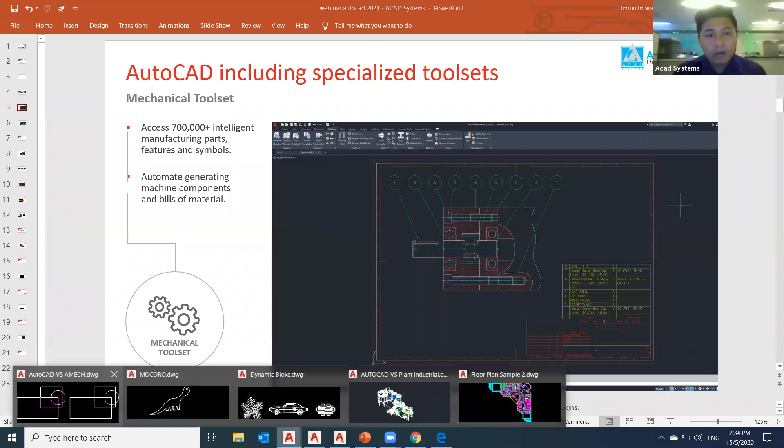For the first topic, which is mechanical toolset, I will share my screen regarding my software. So this will be my normal AutoCAD, my basic AutoCAD. When you use normal AutoCAD, if you plan to create this left area to your right area drawing, you need to do something like this.

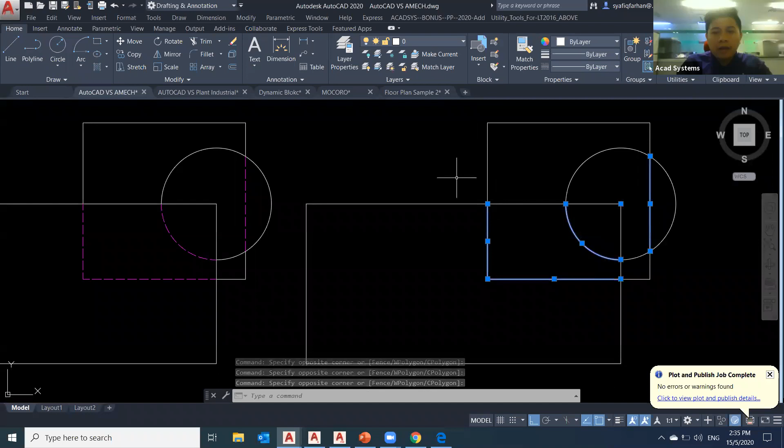You need to trim 1, 2, 3, and 4, and then redraw a line, and also arc - start, center, end, start, center, end. I just simply trim again, and then choose the line that you want to use and specify the layer. Am I right? So that will be the method that you need to do.

But if you're using AutoCAD Mechanical, for example, the most proper way to do this thing - I will show you.

For that specific topic, we call it a hide situation - so circle and also rectangle, another rectangle, using AutoCAD Mechanical. At top you can see AutoCAD Mechanical 2020. Apa yang you boleh buat, just simple step, klik dekat hide situation. So you just simply click on the hide situation button.

So hide situation means you want to put something into a level, right? The first step, I just need to click on which block that I want to include, 1, 2, 3, and press enter. So then all will appear here.

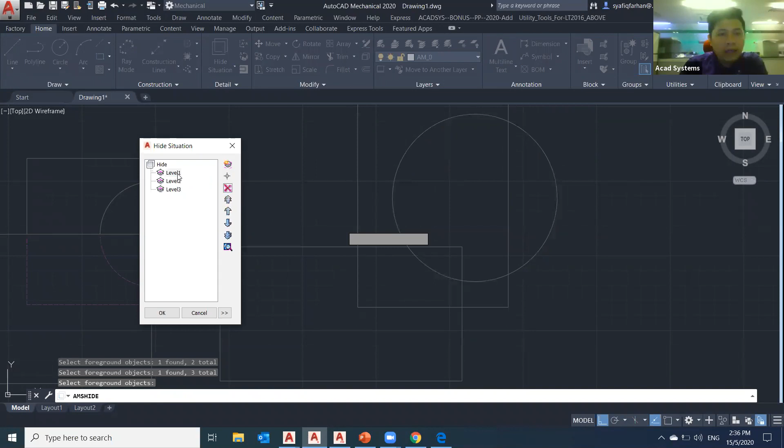So level 1, level 2, and for example I want to add another level, I just simply click on here, new level, level 3. Now I can delete this free object, add a new one. For the first level, level 1 should be this circle, enter. Level 2, select object, this first rectangle.

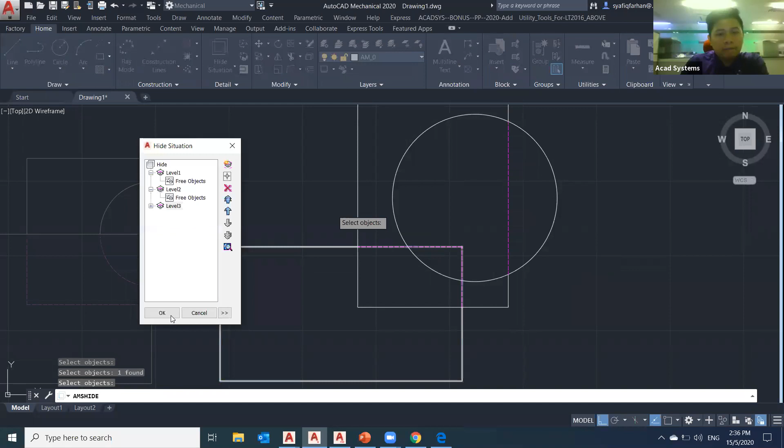Okay, and for level 3, I simply click on the third rectangle, enter. Now you see on my screen this object automatically updates into the first level, becoming circle 1 - meaning the circle becomes the top one, because it has no hidden line. The second rectangle becomes the second level, so it sits in the middle, below the circle.

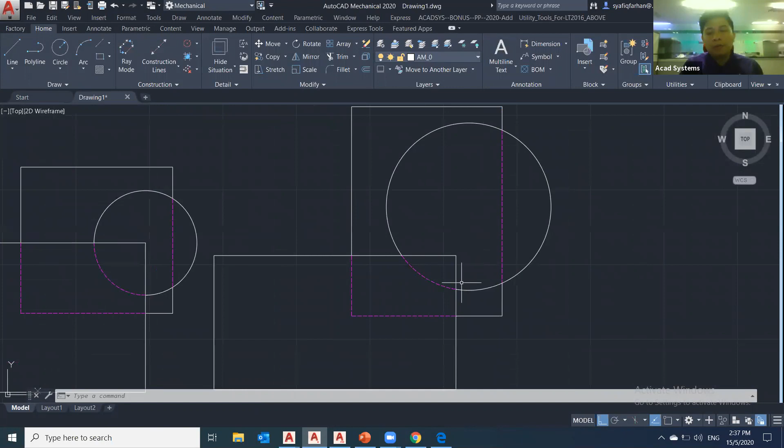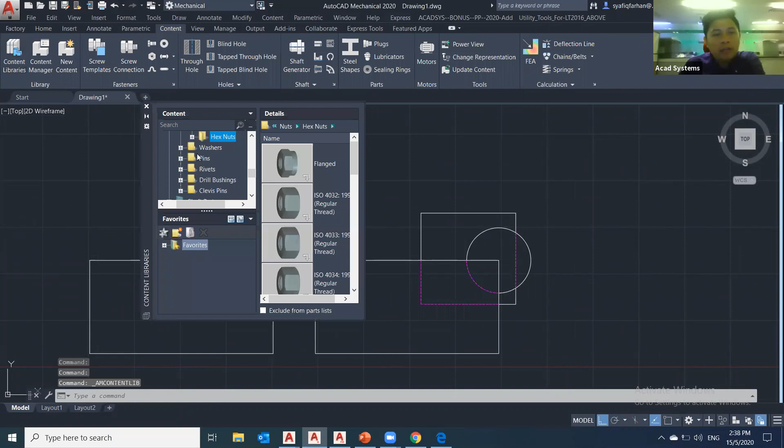So using AutoCAD 2021 or 2020, or you can simply use Mechanical. You can also click on this content, go to the content library, and choose whichever library you want to use - for example, screw, countersink. This will be the first example.

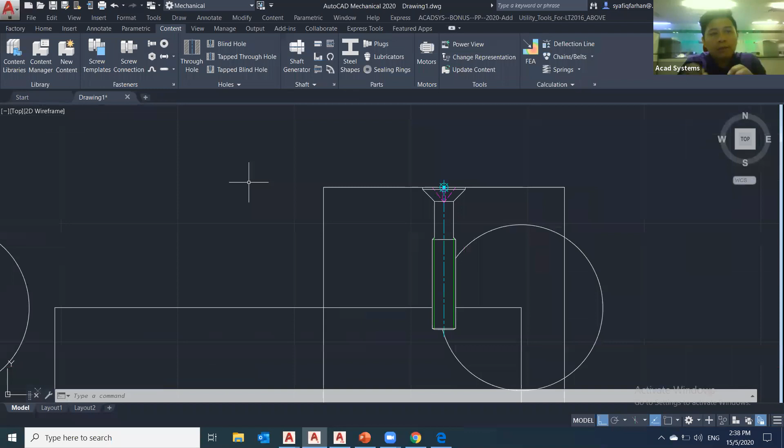Choose size M10 or something. See, it's already auto-trimmed everything. So AutoCAD Mechanical is super powerful because the library is already included in AutoCAD Mechanical. You don't need to download AutoCAD Mechanical separately. That's it, that's the first topic.

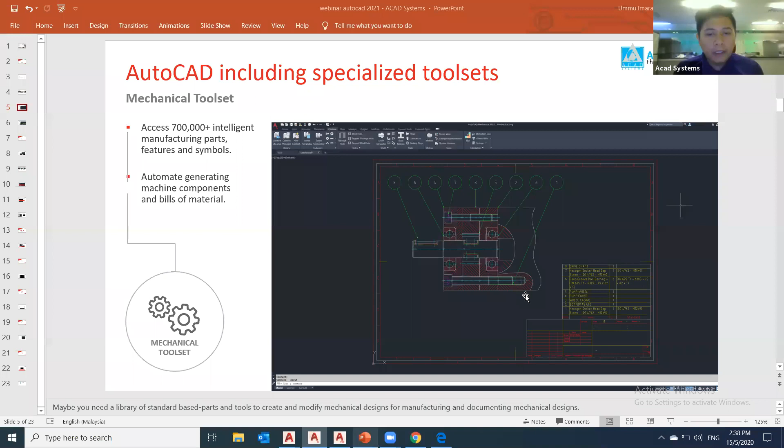For the second topic, this is about if I plan to go to Plant 3D to make a P&ID, meaning a 2D schematic drawing, or if I want to make a 3D piping design in Plant 3D. So is it proper to use normal AutoCAD? Normal AutoCAD is good, you can do 3D, no problem. But the problem is how fast you can do it.

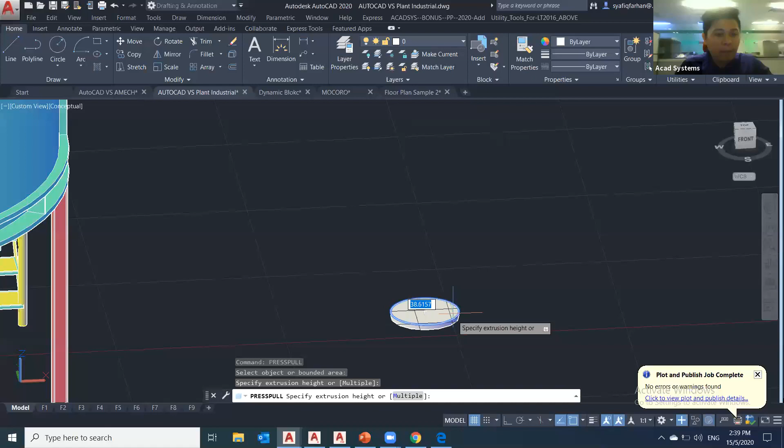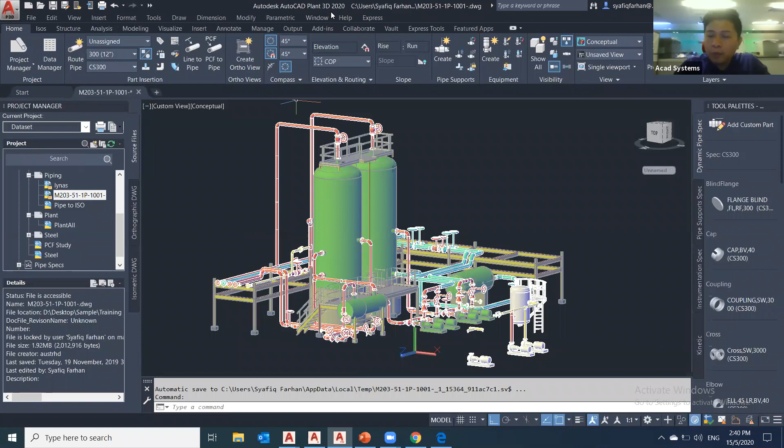But if you use Plant 3D - okay, now I go to AutoCAD Plant 3D. All of this you can download. You can just go to the Autodesk website. If you want to try first, you can go for the trial version, or if you feel AutoCAD is good for you, you can ask our team members to inform you what needs to be done next.

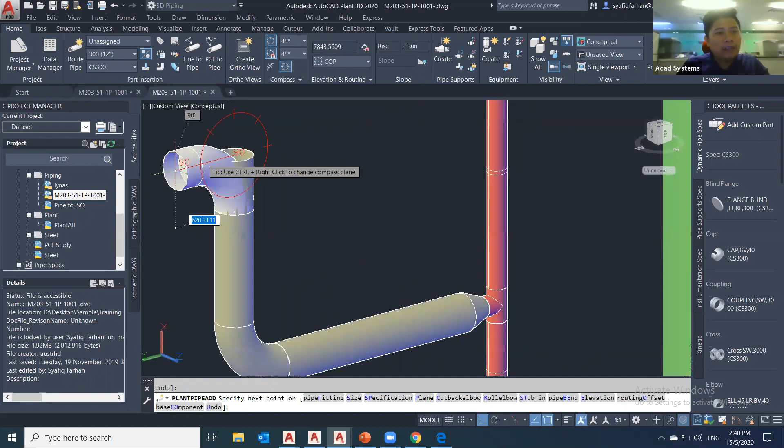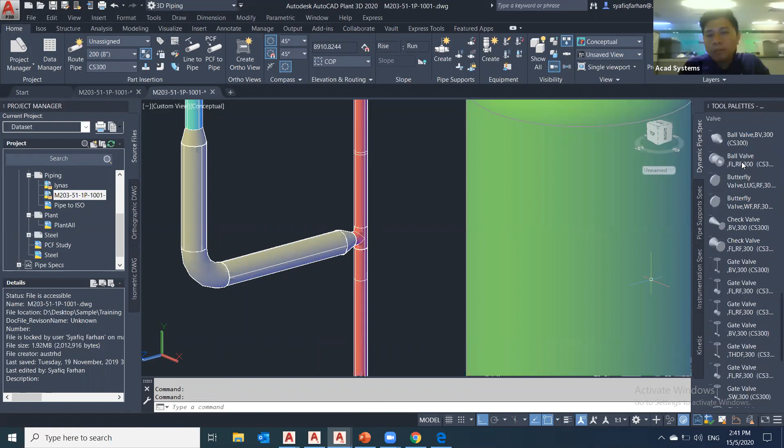Not simply using normal AutoCAD, because that will drag out your time there, making one single part at a time. If I want to put a valve or anything here, I can just choose - for example, I want to insert a ball valve. Now here it has automatically created the ball valve on our piping. So that's the first module, or the first chapter we want to cover, which is the specialized toolset.

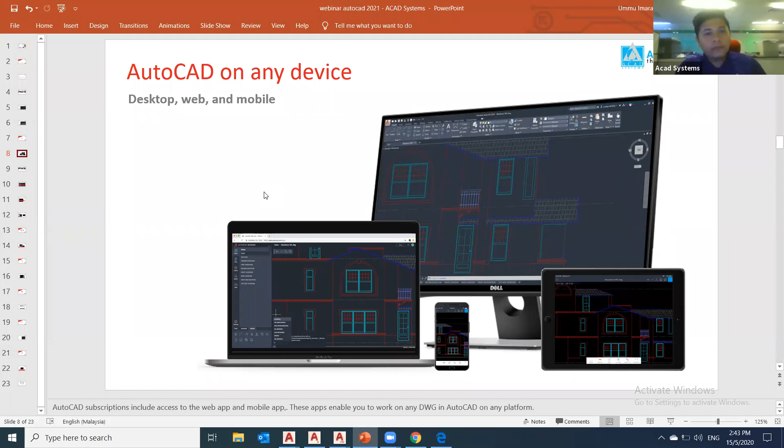So for the third and fourth points, which is block palettes and also dynamic block. I believe all of you are already familiar with block. What is block? Block means you want to use one item repeatedly.

For example, in this drawing, when I have this type of car, I want to use this car maybe two or three times, so I can copy this block.

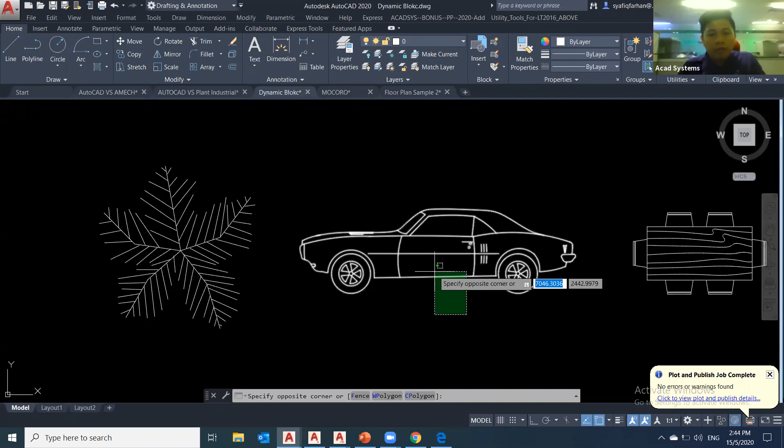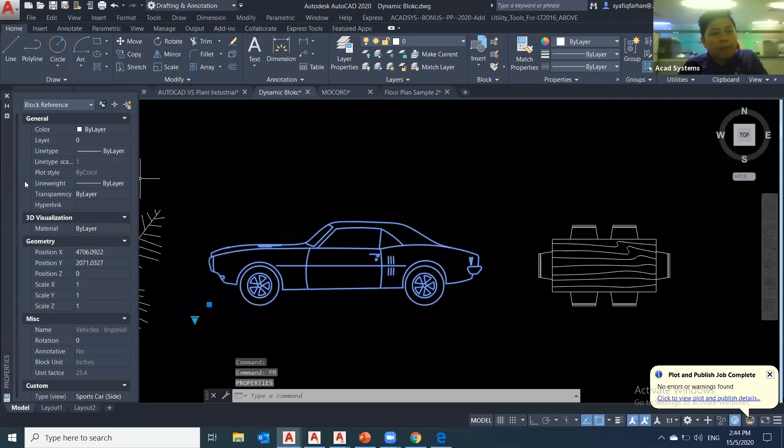If this object is not a block, you need to choose all these things one by one, for example this table. But if this object already becomes a block, you just need one single click, or check on the properties here, block reference. Later I will show how to create one block.

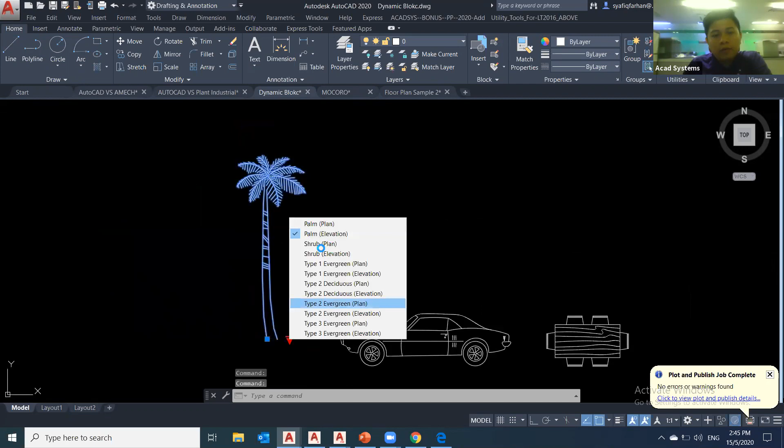What is block? For example, dynamic block. Dynamic block means, for example, these trees, I can change this tree into this object. So you can simply change it. For AutoCAD users, to have this type of block, these two types, this car I change first.

Front view, truck. So for AutoCAD users, you can use this command to call this block, this type of block: TOOLP, for tool palettes.

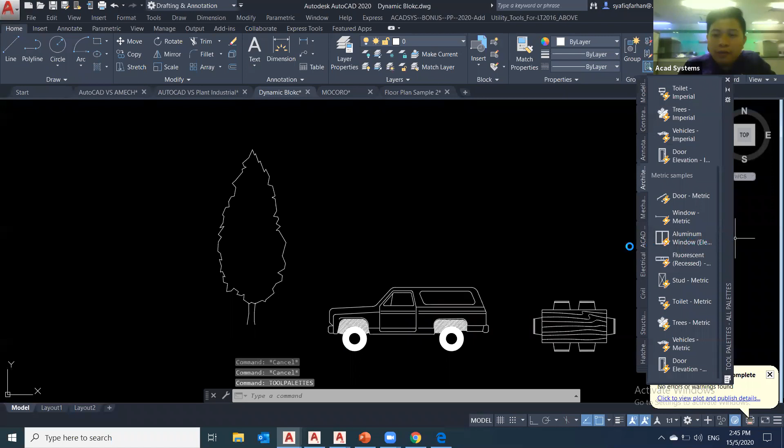Over here, they have a few libraries. You can choose what type of library you want to use. For example, I want to use architectural, and I want to put the toilet. This will be the toilet. Click, and they will have a flip button to flip, and also this one to change.

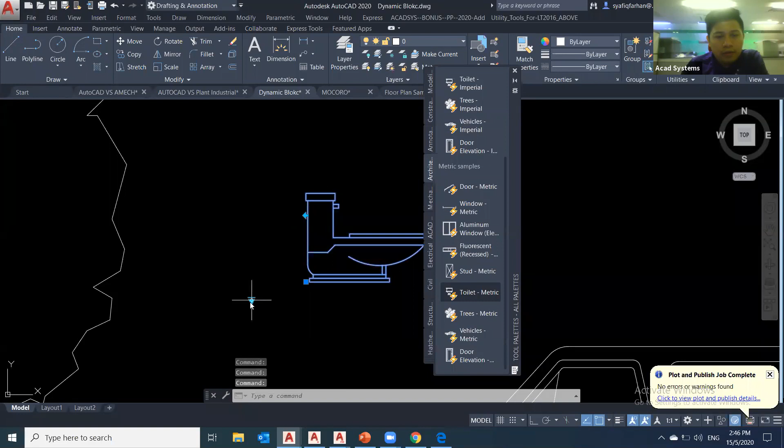So I repeat, the command will be tool palettes, TOOLP for tool palettes. All right, so clear about this.

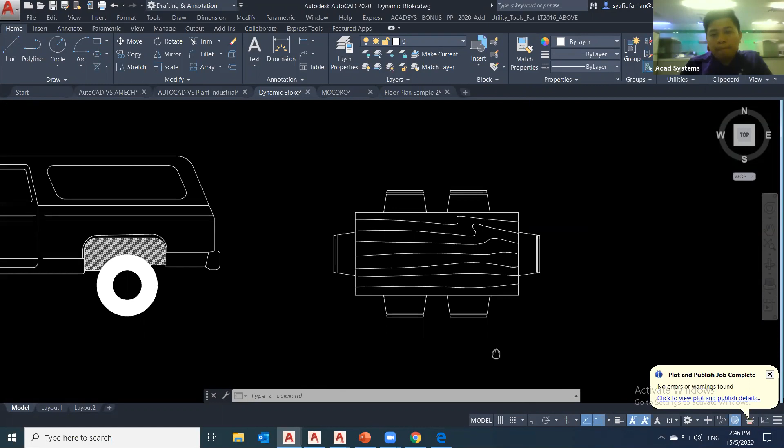So how to create a block? Very good, dynamic block, so this will be the sample. You need to draft one object first, so select everything. Normal method for creating block: B for block. B, enter for block.

First thing, you need to put the name of the block. For example, this one I want to put table. So I put the name as table here. And the second important thing here, you just simply click on the pick point. Pick point. And after that, you just tick on 'open in the block editor'. Only that step to create a block.

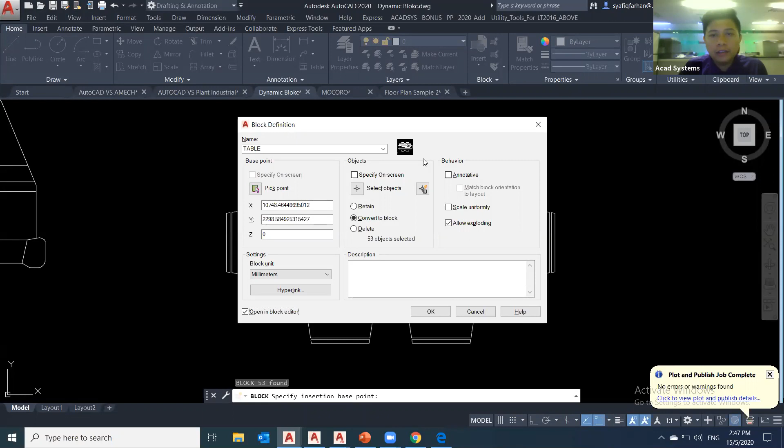But how to create a dynamic block? Same like that tree. For example, for this table, I want to change the table from 1 chair, 2 chairs, 3 until 6 chairs. How to do it? I just open it in a block editor.

By default, you will go to another area, which is this one, we call it the block editor area. So first step, at the side here, go to parameter tabs, visibility. Click, and click anywhere, it doesn't matter where you click.

Second step, go here, visibility state. This visibility state is the area where you need to set what name you want to put. For example, for this case, I want to put 1 chair, 2 chairs, 3 chairs until 6.

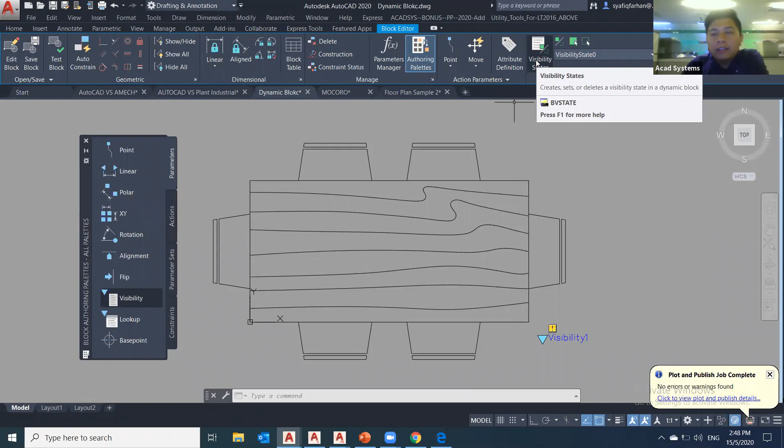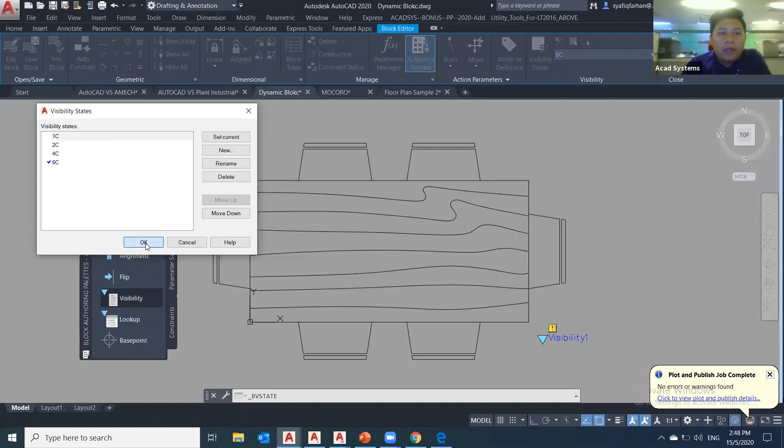So I click here, so I put a new one: 1C for example, 2C, 4C, and 6C. This visibility state 0, you can delete because we don't use it anymore. And hit OK. For 6C, it means you want to show all 6 chairs over here.

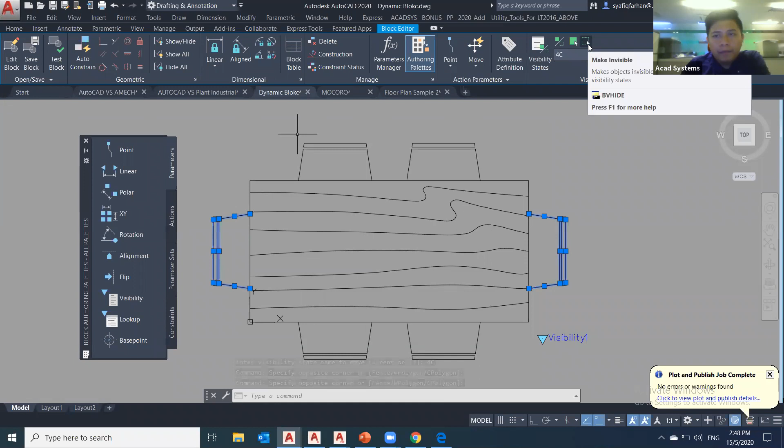But for the 4C, you need to hide something. Select this thing, click on make invisible, meaning you will hide this one. Make invisible. Okay, go to 2 chairs.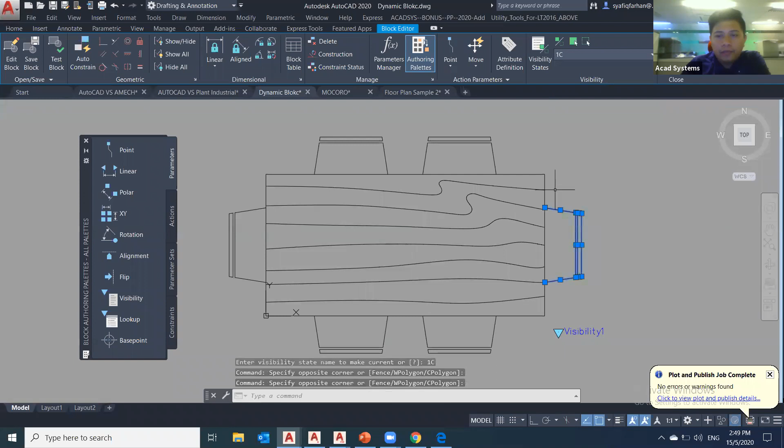So select, for example, I choose this one, these 2, and this 4, total 4, so make invisible, so it already disappears from the screen. And the last one, 1 chair. Just select first, and after that, also the same step, click on make invisible. So that will be the step to create a dynamic block.

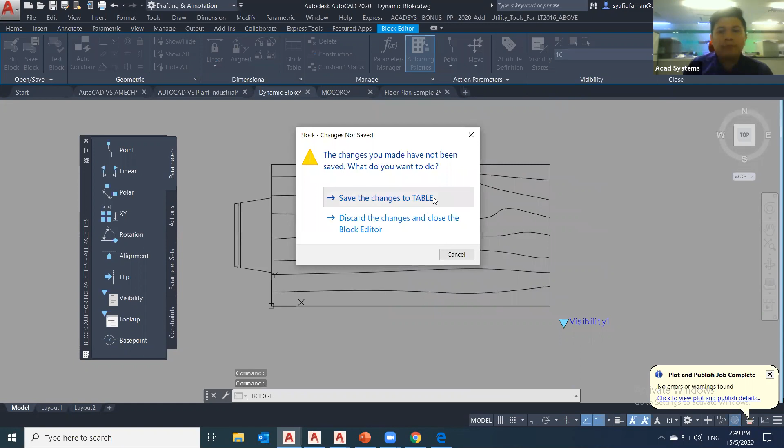Then you just simply go here, click on finish block editor. So press here, save. So now your block is already updated, so it becomes one. So how to change it? Just simply click the down arrow button: 1 chair, 2 chairs, 4 chairs, and also 6 chairs. So that will be the concept that AutoCAD uses to create this car, this toilet, and trees. We call it a dynamic block.

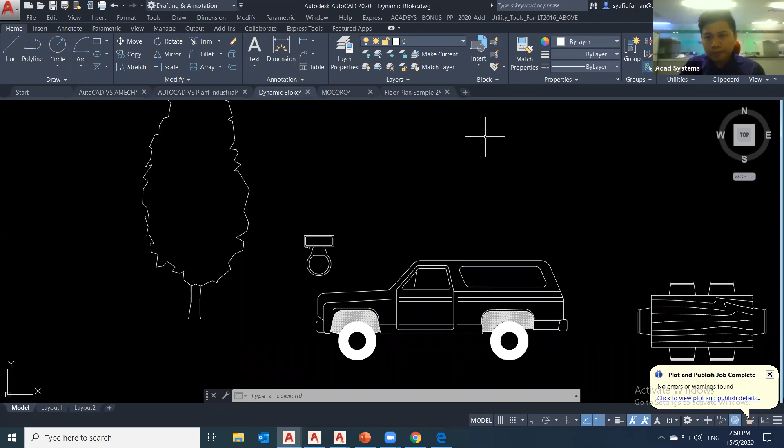Okay, so the next topic we need to cover is what we call MOCORO. This combines features - AutoCAD already combines move, copy, rotate into one command. So how do we use it?

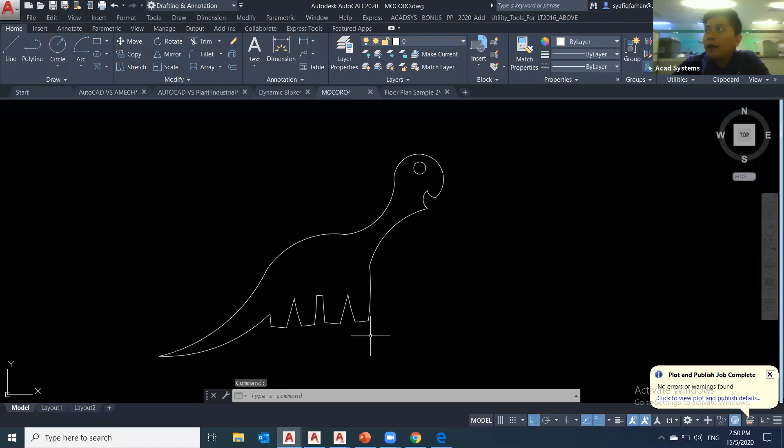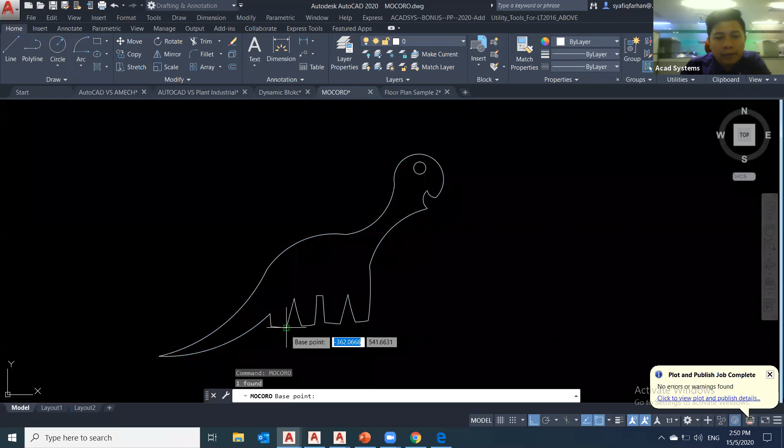Let me open one simple drafting here. To use MOCORO, you just select the object, click on MOC for MOCORO, enter. Base point is the most important one - for example, I want to choose this point as the base point. To move, I just click on move. To copy, I just press copy.

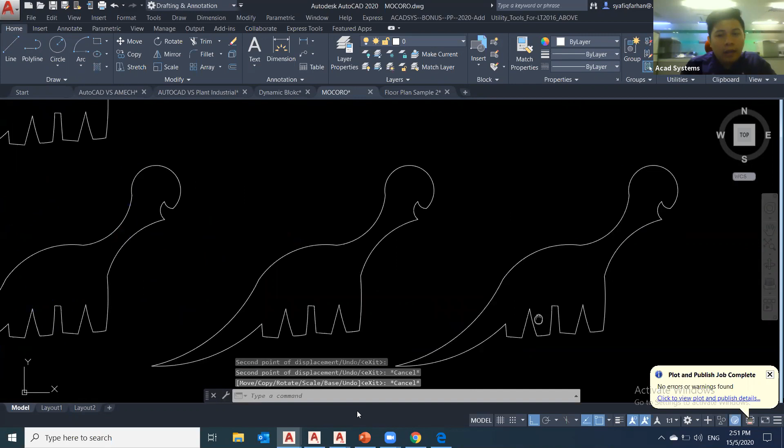Here, and also here. You can use MOCORO at this point too - you can rotate, scale, and undo. So those are the things you will use with this MOCORO command.

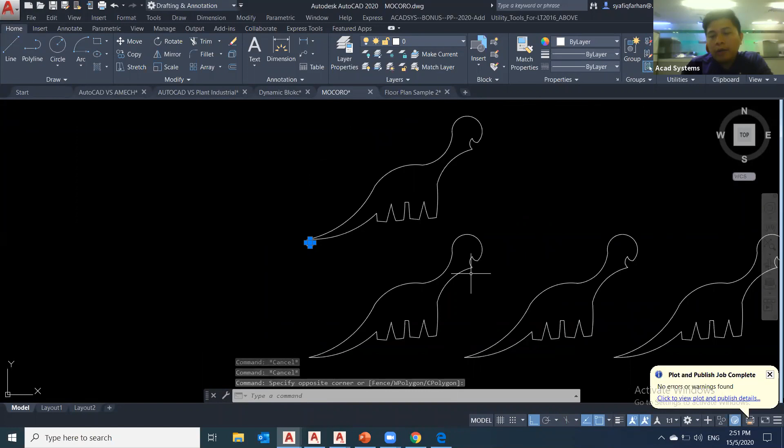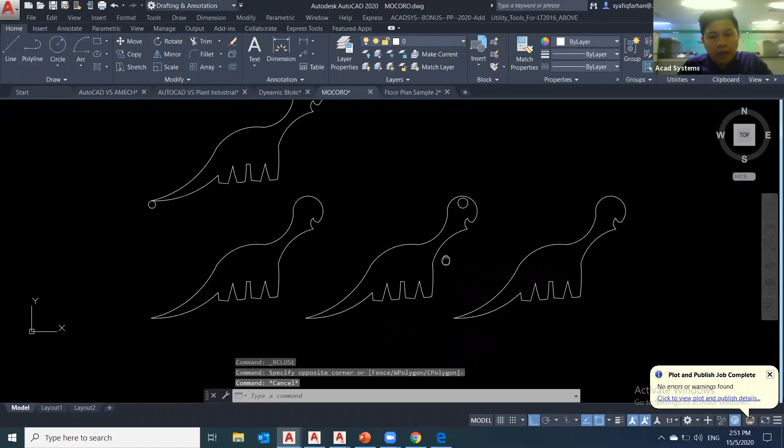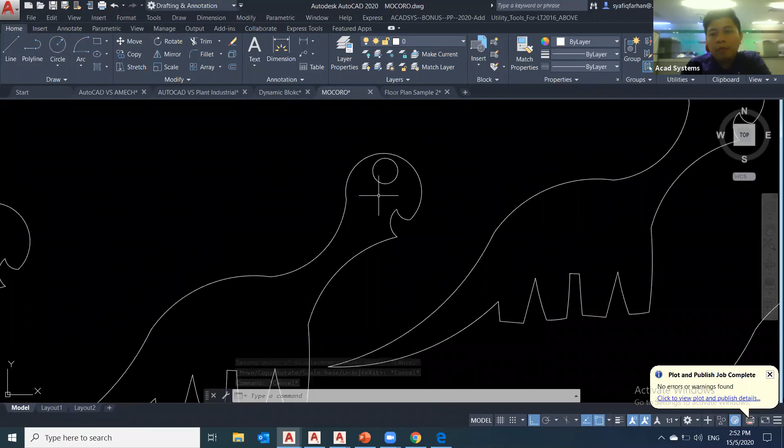Notice that this object, the eyes, are not following together. The reason is because this object is only a single line or polyline, not a block. For example, let me create this object as a block - B for block, draw, close block editor. So it becomes a block. Now when I try to use the command MOC, enter, base point here, I can move with the eyes, copy with the eyes together. That's the reason why the first one didn't move together. So you can try using this MOCORO - for example, if your company keeps repeating this process, you can use MOCORO.

All right, another part is about match properties. I believe all of you are already familiar with this. Match properties is used to copy one object's properties to another, using AutoCAD.

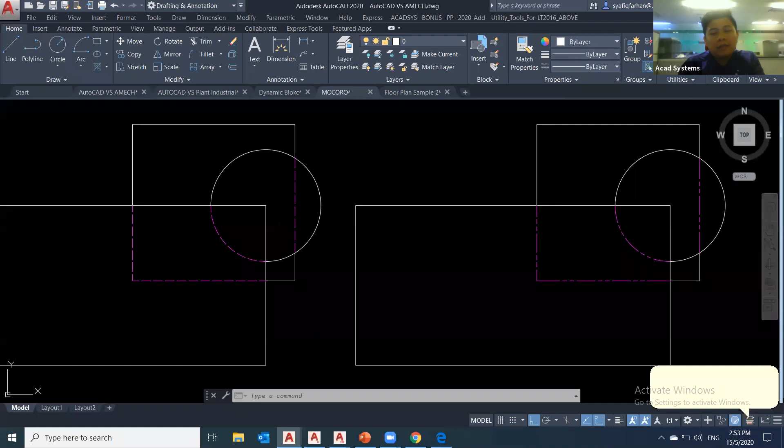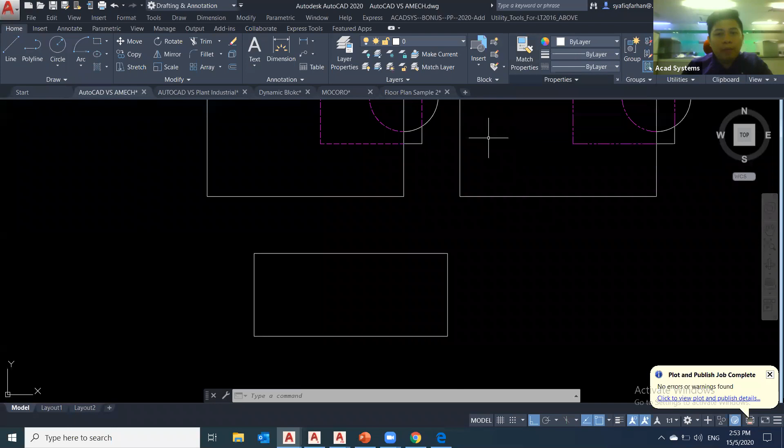So I have another rectangle. I want to copy this magenta dotted line style to this rectangle. What's the fastest way? Match properties - you can click on the match properties icon, or use the command MA for match properties, enter, click here and click on this rectangle.

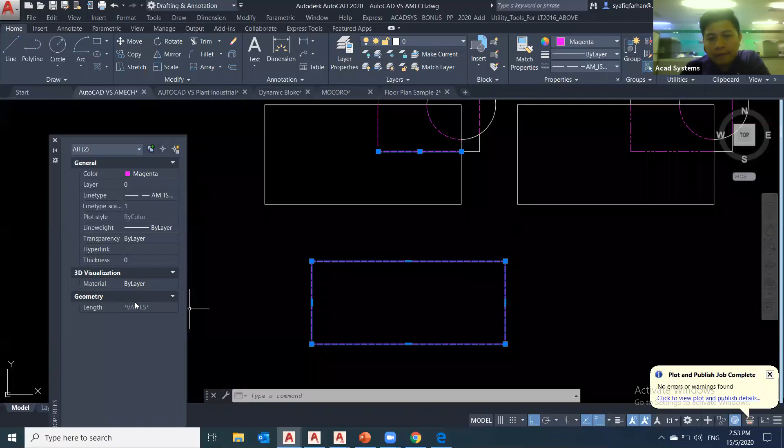AutoCAD software will help you check into the properties - the color will be the same, the line type will be the same, only the general properties are copied together, the length and so on is different - various. But when I try to click another one, all become various because combined - this becomes magenta plus white, then becomes combined. So match properties means it helps you copy these properties from a source to a destination.

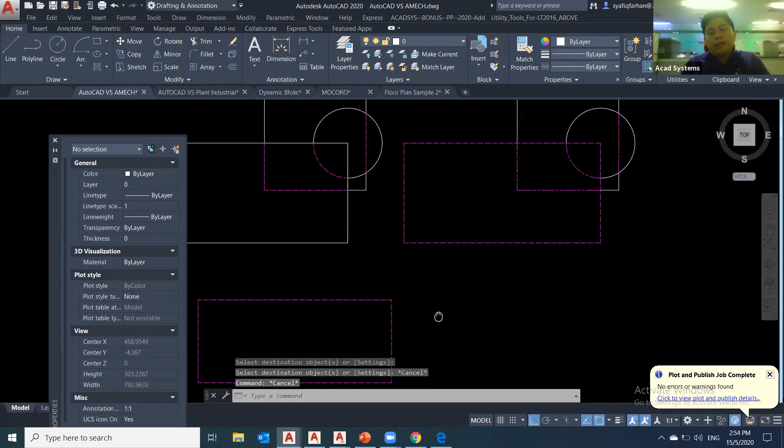Match properties. So here's an example - for the small gear, you want to copy the black color from the big gear to the small gear, so it becomes like this. Match properties.

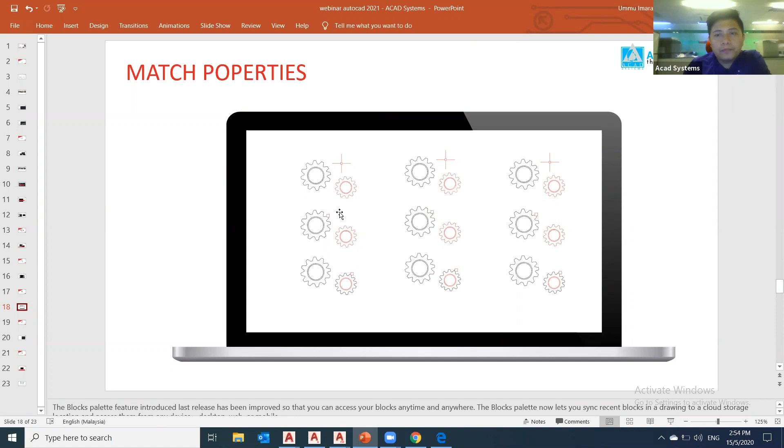Right, so for the next tips and tricks, the seventh one: if I have two drawings, a first revision and a second revision, and my boss or lecturer asks me what's the difference between drawing one and drawing two, what changes have I made? To do that, you need to have two revisions of the drawing.

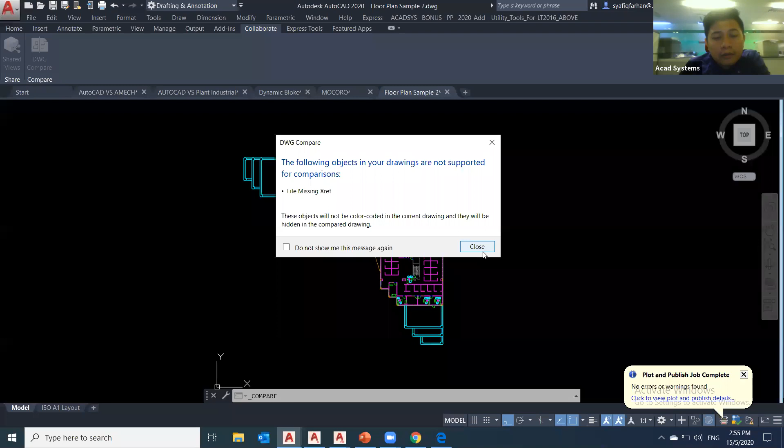So you simply go to this AutoCAD drawing, the first drawing, click on the Collaborate tab over here, click DWG Compare - you can compare revision 1 and revision 2. When I click, you'll see they have two colors.

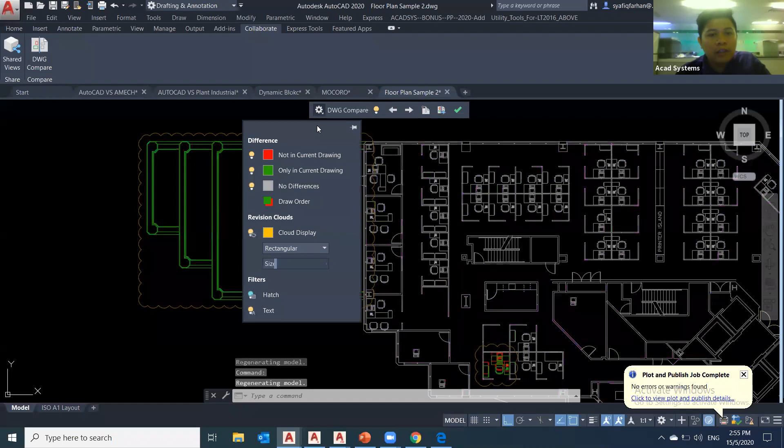The first colors are green and red. So here, DWG Compare - I can change the settings, and you can also change the colors here. For example, I want to change it to blue, so it becomes blue.

So for this comparison, you can see this will be from drawing 1. The green color means from drawing 2, the blue color means from drawing 1. Drawing 2 here has already been stretched, and drawing 2 here has already been moved.

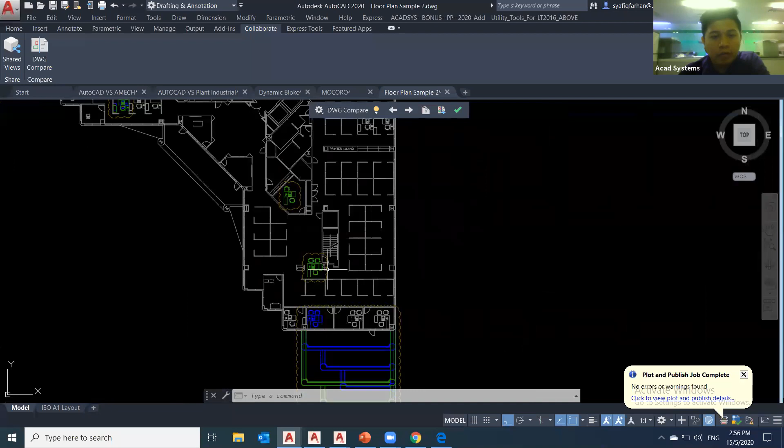For this area, there's no blue color, meaning this is new. This is also new. For this area, there's no green color, meaning previously in revision 1 the drawing had a table and chairs there, but in revision 2 they've already been changed or deleted. That's the concept of how to use drawing compare.

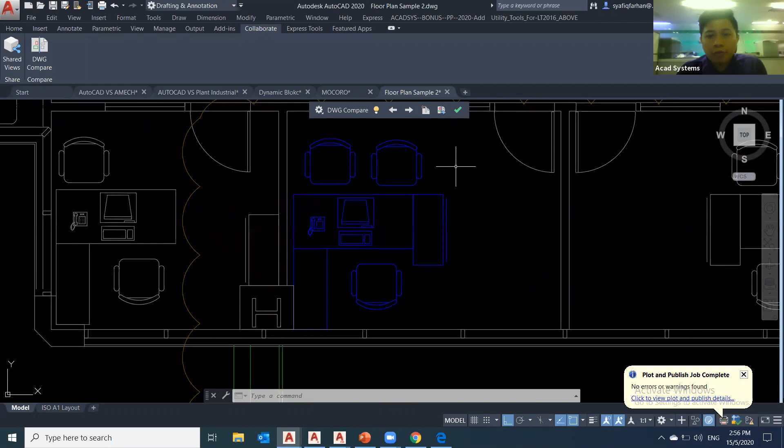So drawing compare is quite straightforward and simple. The method, I'll repeat: Collaborate, Drawing Compare, and try to compare at least two drawings.

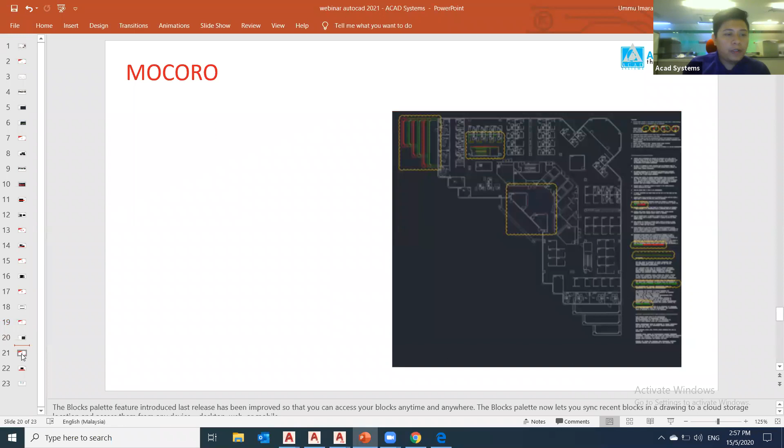Okay, and for the last point, PDF import. This is a very good feature for companies - normally a company will receive a drawing PDF from a supplier, for example. So I only need to open a new drawing.

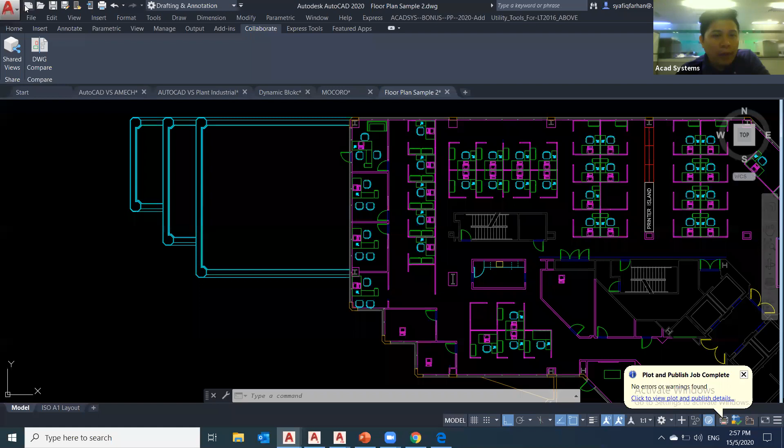Go to Insert - here you will see a button, PDF Import. For example, I have one sample PDF, the floor plan sample from before, the house drawing from before. So I simply do PDF import - I can go to my folder where I saved it, tap it and hit OK.

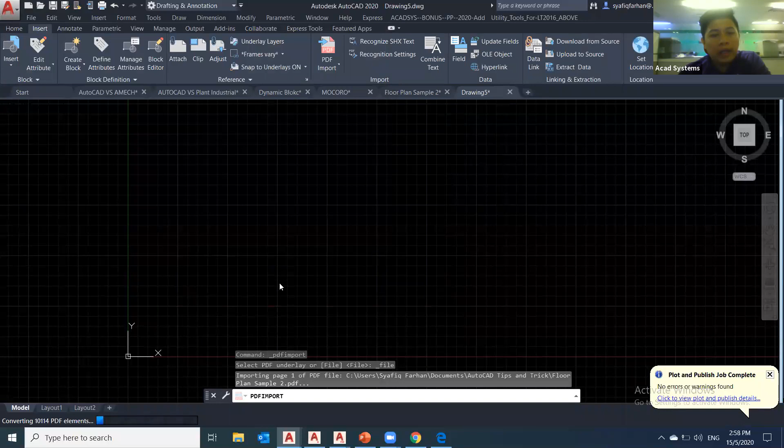This software will help you convert the PDF to a 2D drawing. All the lines are already changed, including the layers.

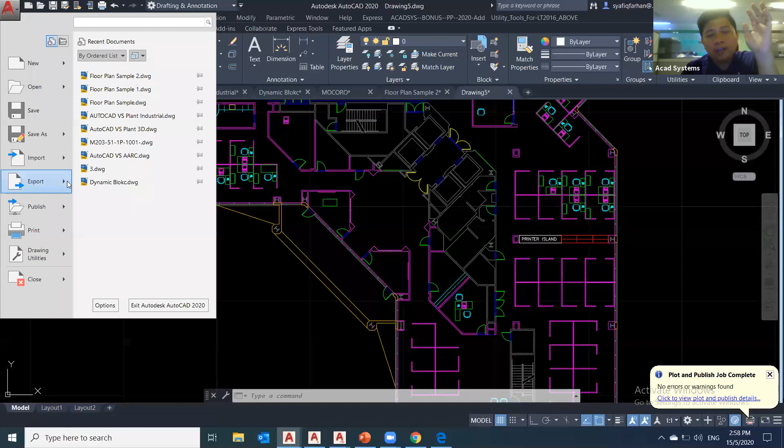Okay, there are two types of PDF. The first is scanned from a scanner, or maybe you snap a picture using your phone and save it as PDF. The second is when your supplier saves it using software, exported from AutoCAD. For an exported PDF, you can directly convert it, but from an image, or an image already converted to PDF, you cannot directly convert. That's the thing.

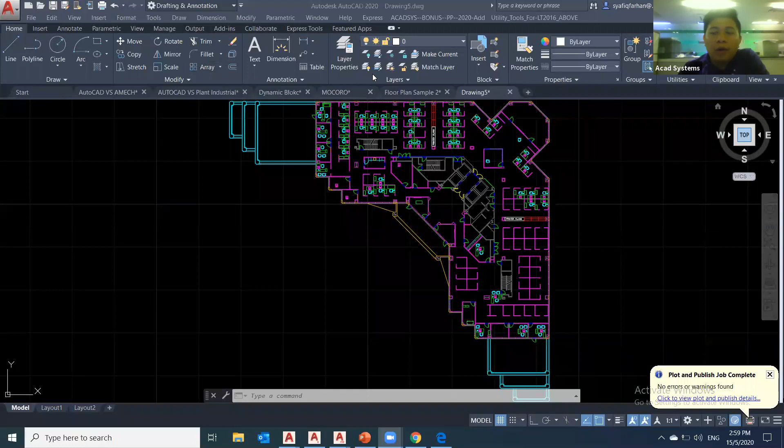You can also group it. Group and block are basically the same, but the benefit of using block is that you can calculate or create a table. Let me show you. This object is a block, so I can calculate how many chairs are inside this drawing, simply using table data extraction. If you use group, you cannot do this.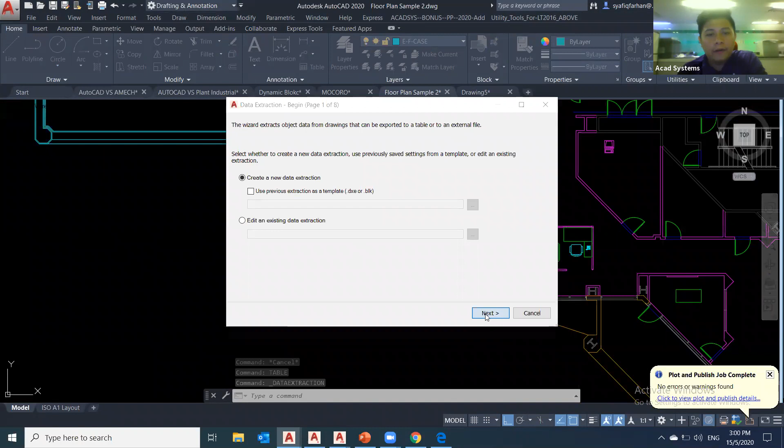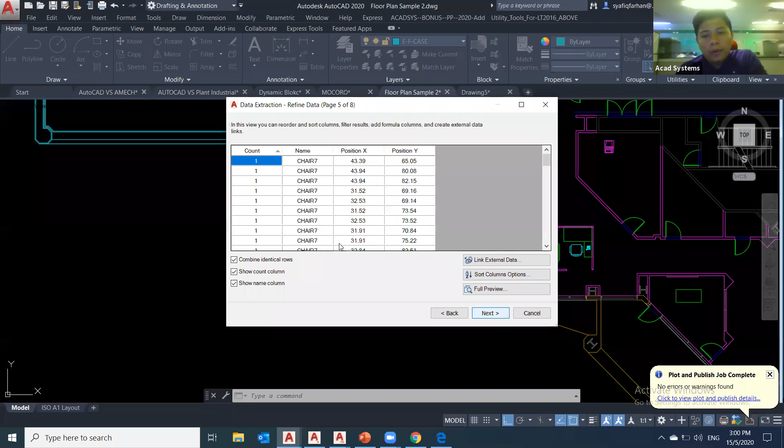I'll just go through it first. Only chairs, only position X and Y. Next, using AutoCAD, using the full version of AutoCAD, you cannot use the LT version. So you can do this when you have a block, but if you create it as a group, you cannot. That's the difference - block means you have the information, but group you don't have any information.

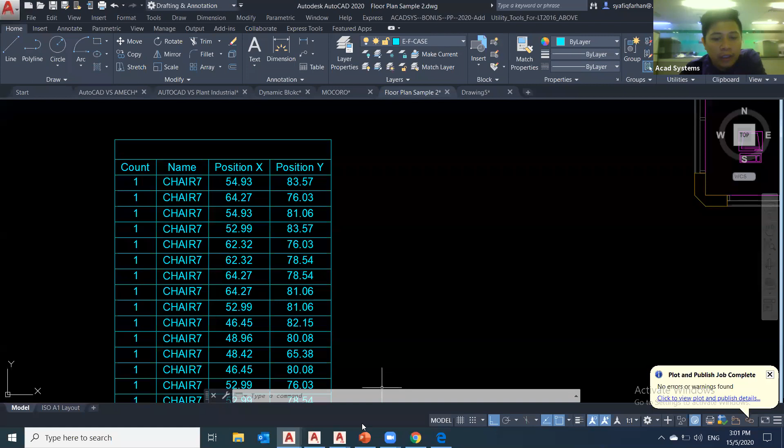The scan is blurred - how to draw it? If you use a scanned copy PDF, you need to use the Raster Design features. You need to install Raster Design, which is also included in our bundle, the AutoCAD specialized toolset. Using Raster Design, you can inverse the color from white to black, then redraw the line by clicking the endpoint, all the endpoints. You can simply click.

How to measure the perimeter and square feet for every space? If you plan to have something very detailed, maybe you want to ask so many things, we can plan online training for you.

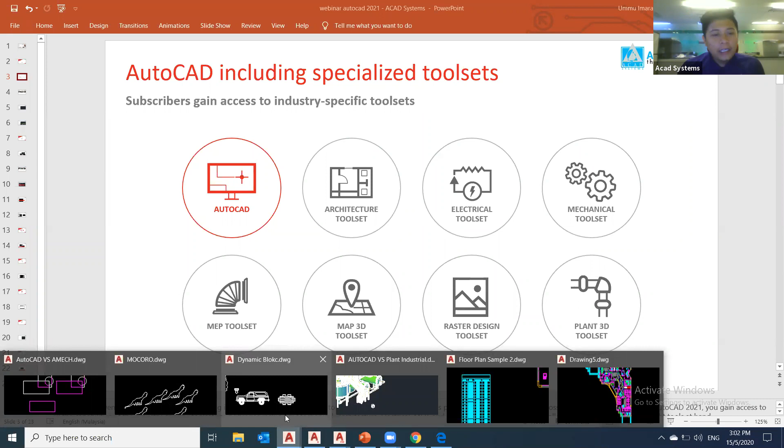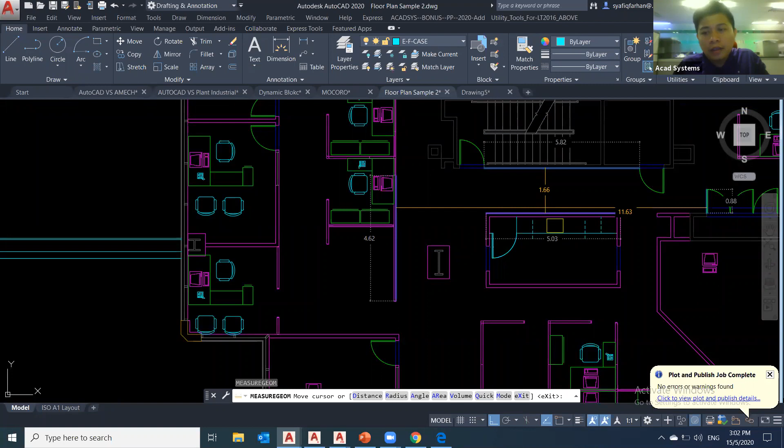This will be the last question I answer for today - how to measure the perimeter. Using AutoCAD 2020 and above, when you measure, just type MEA for measure geometry, and you can simply mouse over. It's that easy, right? Compared to the normal one, you need to pick point by point. Let me show you the previous method - MEA, measure geometry, click on the distance, 1, 2. This will be the distance.

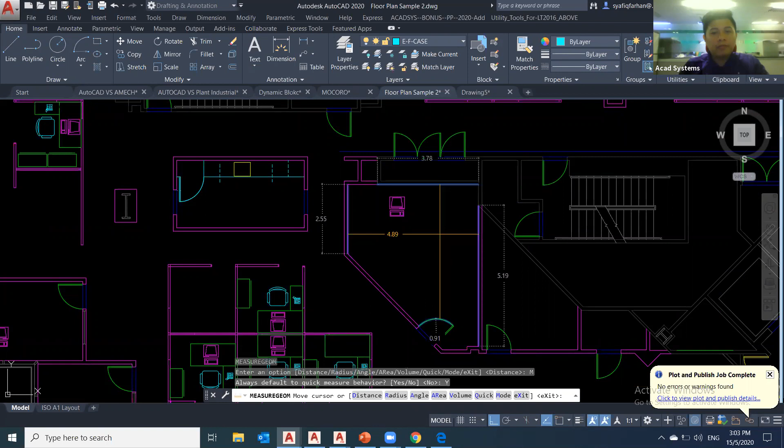If you want to check the perimeter, you need to manually add it here. So MEA, measure geometry, in AutoCAD 2020 and above, you can do this automatic measure.